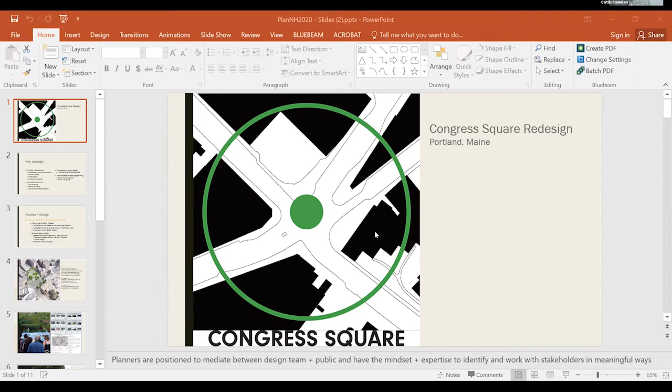And David, Friends of Congress Square Park, they've really fostered a sense of belonging and inclusivity with their efforts so far, between the new furniture, the events, the volunteers, the maintenance.

So you might be asking why redesign if you've created this environment that is sort of the epitome of an urban public space. But as David hinted at, Congress Square is a highly visible and trafficked intersection. And it's in the center of our arts district and on the main street of Portland's Peninsula. But the square is very busy. There are fast moving cars, and cars have really dominated the intersection since the urban renewal effort to create that particular traffic flow and pattern and the park spaces.

And there are also physical barriers there that limit access to certain groups of people. There are uneven surfaces, there's the 4-foot grade change, and there's the intersection itself, which is very wide and difficult to navigate.

And there are elements that make the space less hospitable, such as the lack of seating options, although now that's improved somewhat with the movable chairs and tables, but also barriers to visibility into the space. There are the many steps that provide seating during events, but also can create physical barriers for some to enter the park. And there's a lack of elements sometimes, although again improved with the plantings and the movable tables and chairs, but until those went in, there wasn't much in the space to make it inviting or feel lively unless an event was going on.

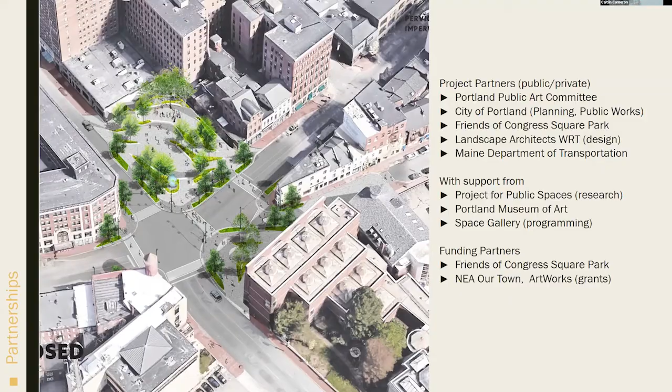So just a couple of things about the vision and design process. We had a lot of different ways that we went about gathering information and having a visioning. People who spend a lot of time in this space are the ones who should be telling you what they want and need, and what's not working now.

So the project partners used a combination of techniques to determine the vision, goals, and programmatic needs for the redesigned Congress Square. Friends of Congress Square were instrumental in collecting data—you can see some examples here. The programming that has happened already is key data, and there were also studies done around circulation and how people are using the space.

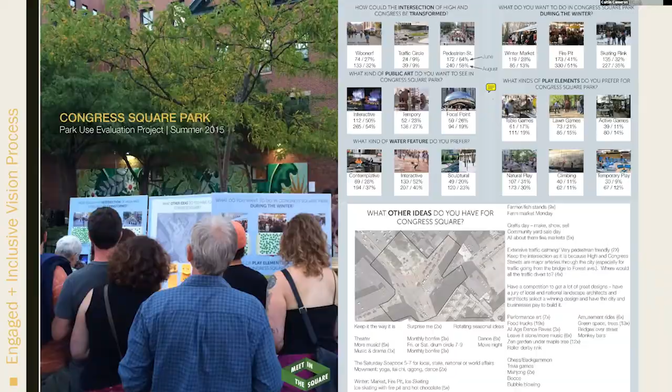The planning office really thought about different ways to be inclusive in this data gathering and visioning process. For example, posters and meeting announcements included translations into 4 other languages.

We used Neighborland to brand the vision process and collect ideas through social media such as Twitter, online surveys, and traditional in-person facilitated meetings. But we also thought about how to be inclusive for people without internet or smartphones, or who otherwise might want to be anonymous in their feedback.

So we had these billboards in the space itself and at City Hall with Sharpies where people could tell us what they wanted in Congress Square.

The resulting vision statement and program for the project came from all of this visioning input, but the crafting of the vision statement and program were also opened up to stakeholders to provide edits, suggestions, and comments to fine-tune those documents, which were then used to go out and select our consultants.

So we did go through an RFQ process. The project also includes a public art commission as well as the landscape and urban design.

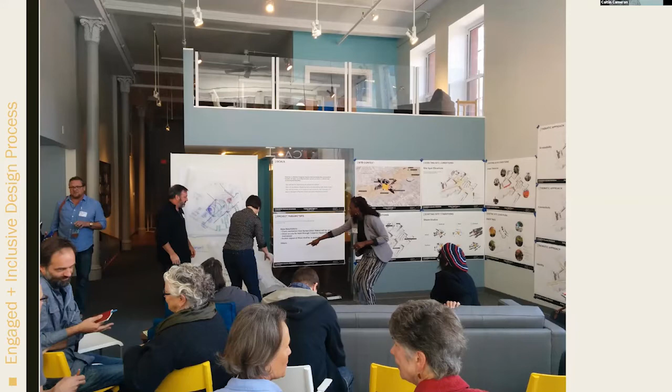The initial design phase included a 3-day workshop and open houses in a co-working space on the main street of Portland, very visible, where the public and stakeholders could walk by that storefront and observe or participate and provide critique, see the design work in action, come and go. The hope is for broad community buy-in and ownership of the end result due to all of this direct participation and input.

So just a couple more points on the design itself. Having all of this process hopefully is leading us towards an equitable, inclusive, and accessible design and result. Some of the inclusive concepts or programmatic elements part of that design include all season use and visual interest, day and night use with safety and visibility, variety of seating types and different conditions, accessible to all abilities and ages, access to art in public free setting, access to Wi-Fi, which the Friends group has been able to provide for a number of years, and also the opportunity for outdoor dining to continue for the adjacent businesses.

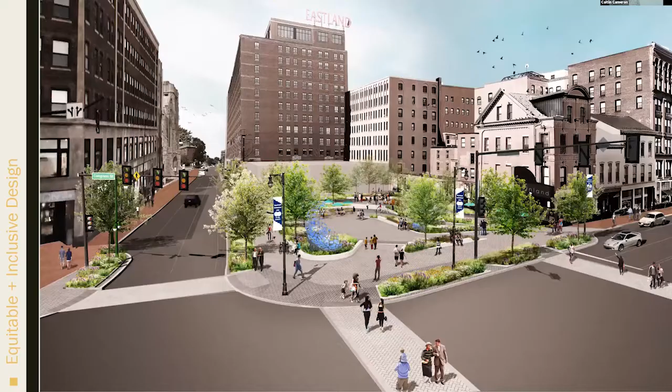So this is a rendering of our design development for the space. This includes the intersection as well as the park spaces. That idea of accessibility is not just the pedestrians in the park, but thinking about right now, the cars and vehicles really dominate the intersection. So there's a major goal here to rebalance the intersection in addition to the park spaces towards complete streets, having them be more multimodal and safe for hearing impaired, visually impaired, and those kinds of considerations as well.

So I'll close with a quick lessons learned. This kind of partnership, having a public-private partnership project team, definitely comes with challenges. It's more cumbersome to coordinate schedules, for example, or it can be difficult to find consensus and keep the conversation on track and provide feedback to the consultants in a cohesive, unified way. But it definitely adds time and effort to do a project in this way.

But there have been so many benefits, including my own personal appreciation and buy-in for the project. It's in my neighborhood, and I live and work here as well. So there's just such a strong connection for this place and the people I am working with and for. So that's sort of my piece on the whole deal, and I'll turn it over to Misa.

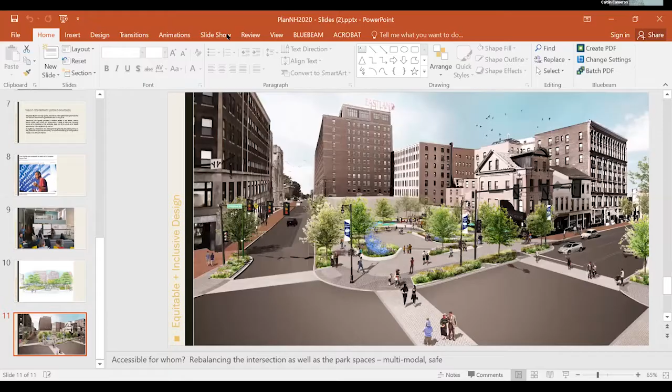Great, thanks so much, Caitlin. That was great. Yeah, this is certainly an exercise in placemaking.

So it's not just creating a park, but it's creating a place. And as the Project for Public Spaces points out, there are 4 key ingredients to think about. You need to think about the sociability, the uses and activities which are going to happen there, access and linkages, not only physical but visual and other ways, and then comfort and image. Do people feel comfortable? Is it sittable? Can they hang out? So that's really great.

And now I'd like to introduce Misa. Misa, you want to unmute yourself? Misa is with WRT Design in Philadelphia. She's a landscape architect, and she has worked on the redesign of this place going forward.

Hi, everyone. This is Misa Chen. I'm a landscape architect, senior associate with WRT. Our main office is in Philadelphia. We also have an office in San Francisco. So today for my part, I'll be focused on the strategy to make a public space for everyone.

Continuing the conversation from David with Congress Square Park, that has been activating the space over the years with project partners from the cities and other stakeholders. Really for our task, it's more of how can we as a design team continue that momentum to reimagine the public space that's already well beloved, activated. People know where to go if they need a tiny getaway space in the downtown art district here in Portland, Maine.

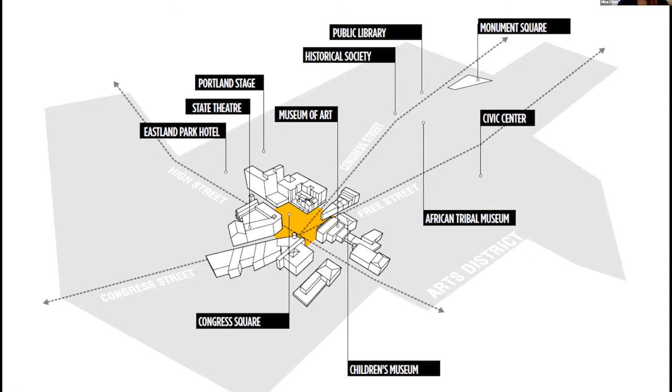So just to orient you, you guys are probably more familiar than myself from Philadelphia in terms of geographic distance and all that, but just pulling out from where we are here, looking into the intersection. When we joined the project, we were tasked to really re-envision the overall intersection as a whole, and we call it Congress Square. Congress Square Park is part of the corner there, surrounded by the State Theatre. We have this historic H.H. Hay building at the little triangle wedge shape there, and we have the PMA Museum of Art right here. So we looked into how to transform the overall intersection with a cohesive design.

Really briefly, just picking up from part of the process that David and Caitlin already mentioned, and really from the design team's point of view, what is our design process here as part of that inclusive process?

So backtracking there, back in 2016, May 4th, we had an interview with the city in the morning. The same day, in the evening, we also had a public presentation to share our thoughts. It certainly was a very unique situation where we got to have more focused conversation with the client group. At the same time, we got to share our thoughts, our team strategies, and some of our ideas with the larger community folks at that location.

Here you can see we actually had the public presentation at the PMA that evening.

So when the project started, kickoff later that October, we started off with a workshop, one of three workshops we envisioned to have. Despite that, there's been a lot of conversation and discussion throughout the visioning process that Friends of Congress Square Park and the city have done, also with PPS. From our design team's point, we've settled on a larger vision statement, and we wanted to refine it into a goal, coming up with design strategies, and start working toward an implementation plan.

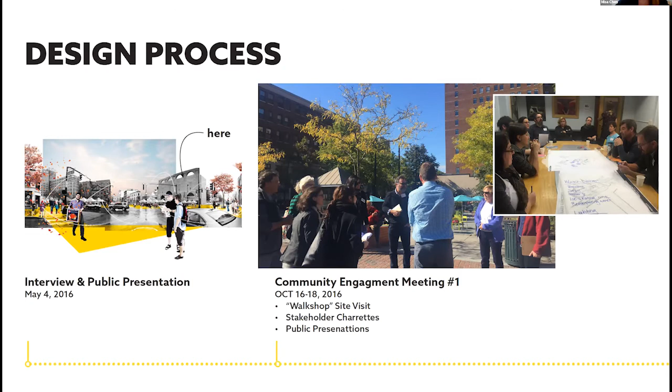Continuing, we had another two community engagement meetings, every other two months, checking in with the community to share our progress and what we're up to, continuing to refine our design by incorporating comments, feedback, and anything else we overlooked.

As you can see, it's a very well-beloved space, and everybody knows the place more than probably we do. They know the daily basis needs, the seasonal needs, and what's working and what's not working.

So with all that anticipation and engagement, we kind of arrived at the schematic design wrapping up in 2017, and continued moving on in terms of design refinement, the design development as we call it. It was completed two years ago, in 2018.

So currently we're working with Maine DOT and other agencies just to continue pushing through the project, waiting for the next stage in terms of wrapping up the construction documentation.

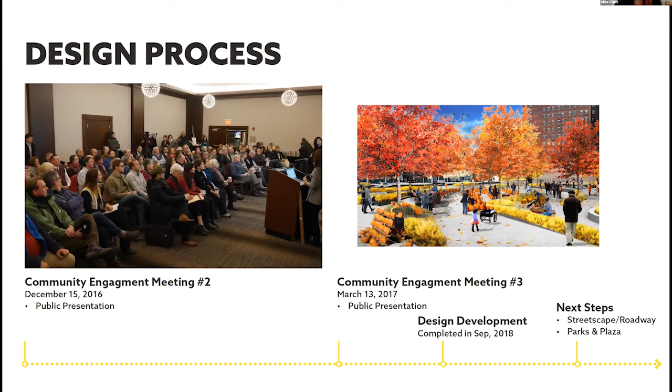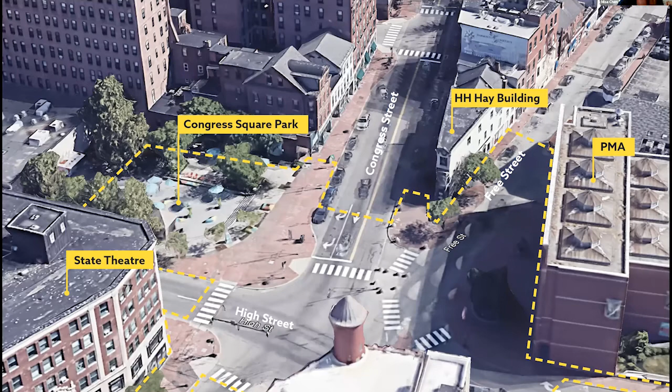So a very quick one, how do we get from here—as you can see, the current day it's well used, with seasonal interest out there—how do we get from here to an overall transformation here. So in the next couple of slides, probably 8 to 9 minutes, whatever time I have, you'll get to learn and hear a little bit about the design strategies and tools that we use to transform the space.

Just to distill from the visioning statement, understanding the project goal: to create a welcoming, inclusive Congress Square Park, celebrate local arts and culture, foster spontaneity while remaining accessible and inviting to all. So we refined this into three perspectives that could bring positive social wellness, accessibility, and identity impact.

How can we continue to reinforce some of these strategies in terms of social and wellness? We aim to create a space that can support year-round, day-to-night, active versus passive or contemplative activities. Some kind of experience where you don't just walk in and learn it all at once—you have elements of discovering, creating curiosity and interest from time to time when you visit the space.

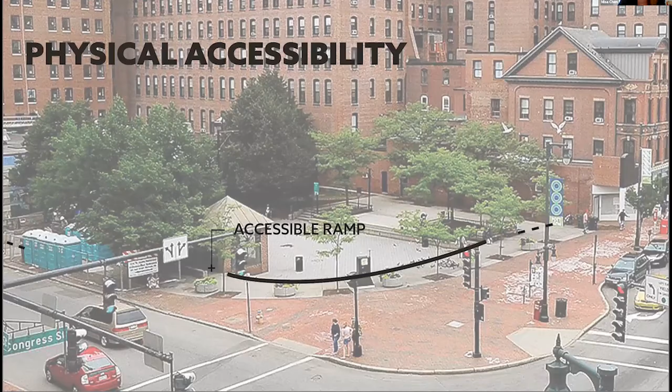So here's an outline of the permeability—how people can really enter this sunken space while still providing a comparable entry experience. How can we all go visit the park together?

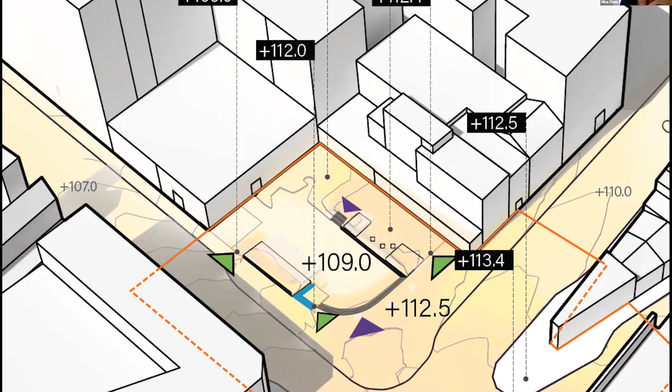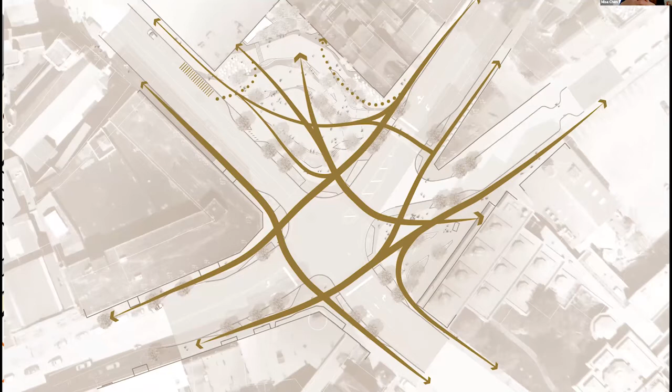This is some of the technical study we went through to understand the current characteristics. The green arrow shows the flush condition where people can come in, and the blue outline is the little ramp behind the clock tower. Can we take this character and transform it into something more fluid, where people understand the hierarchy of where the main entrance is and where the accessible route is, without feeling like they have to take an alternative route to get in there?

So we did numerous studies to reimagine this space as a continuous surface, understanding that the sunken character is still very much what people feel is unique about Congress Square Park. We wanted to maintain that somewhat sunken character, so we make it a continuous space, gently pressed down, cut through with stairs at the intersection to acknowledge the main entrance, while allowing the rest of the boundary to be as accessible as possible.

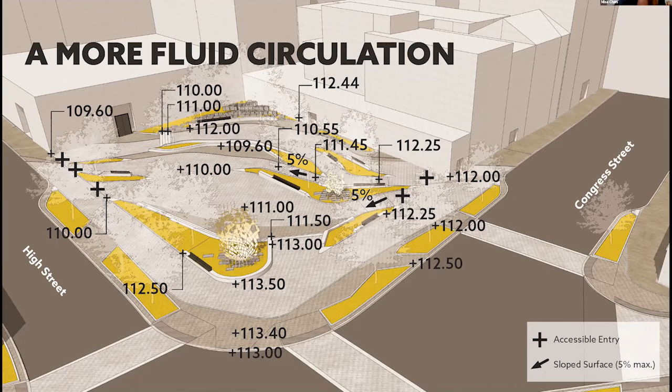So then people can take different routes, whether they're going to the stage, entering the main park area, or going through the planting area to your right-hand side. This close-up demonstrates a more fluid arrival experience, where people can enjoy getting to the center of the park without feeling that the stair character is hindering how they arrive there.

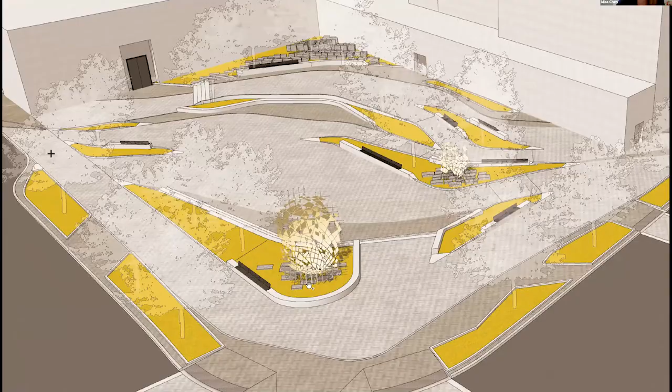Once we understood more of the circulation and arrival experience, the next thing—quite core to Congress Square Park—is the programs and activations. There are programs for everyone currently, and we wanted to make sure the redesigned park continues to accommodate that, programs for everyone. We can see some examples out of the 200 programs David mentioned, from small, medium, large to extra large, including civil and social movements that extend beyond just Congress Square Park to all intersections. So it's about giving a space intentionality while balancing it with flexibility.

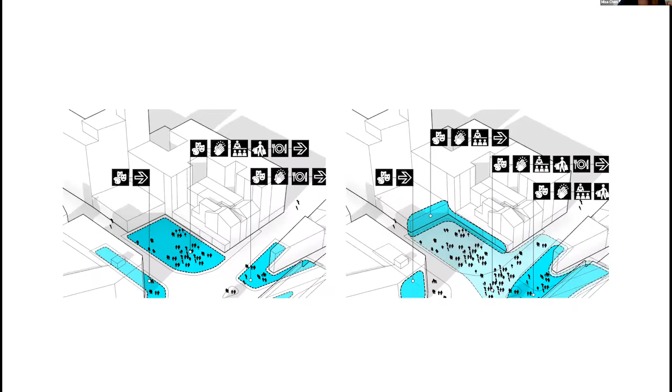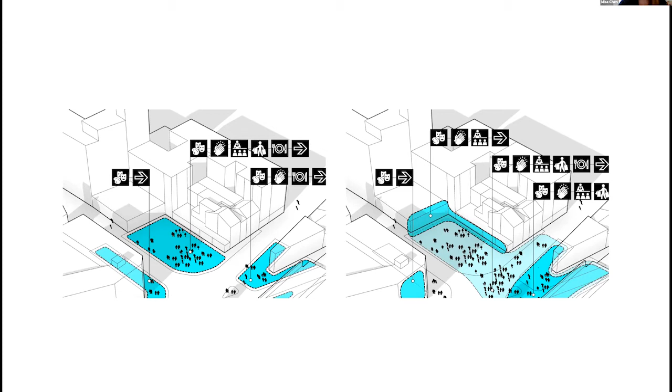These are some of the early on diagrams, super high level, but we wanted to think about it, Congress Square Park, and when there's a special event that will extend through the intersection, and maybe some of the wall space, we can also think about activating them as part of that program activation. So after the bubble diagram fits into the site on top of the layer of circulation, then we start to carve out the space.

This is testing through numerous rounds of back and forth, working with the city and Friends of Congress Square Park to understand the size of the dance mat, how many would they usually use, and the size of typical movie nights. Every pocket is intentionally laid out, but in a way that when there's no event, there's still a certain setup to activate the space.

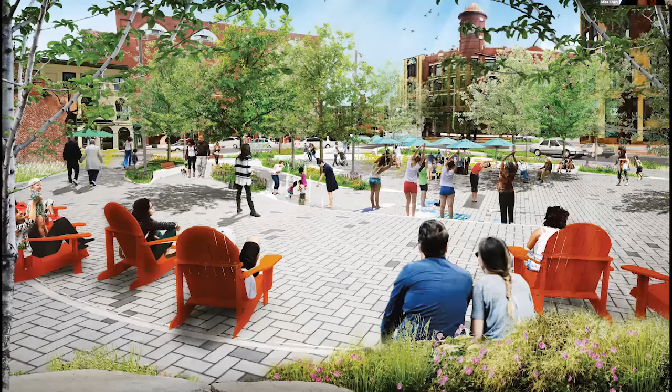At the same time, there might be people who just want to pass by, not super engaged with the whole event. So we want to balance the directly engaged group versus the passively engaged group, and people who don't want to be engaged at all, making sure there's a spatial organization that can accommodate different modes of social interaction here.

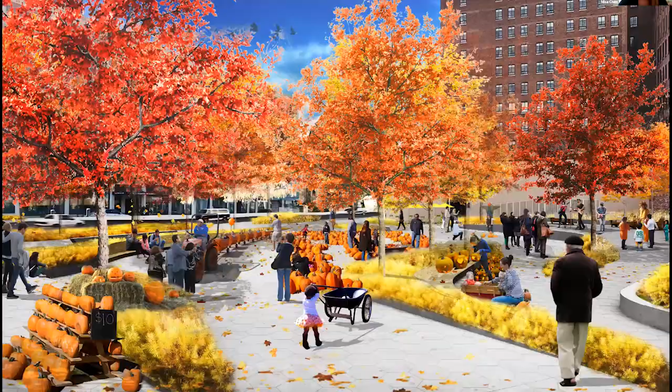Quickly, a couple of views—we wanted to create a vision that's also realistic and achievable. In summertime, the water jets are activated, yoga happening maybe not directly in the wet zone but close by, movable tables and chairs in the background, and the Adirondack chairs that people recognize as Congress Square Park. There's been a sun-facing spot, and we wanted to keep that tradition. Through the fall season, some festivals, an ideal snowing day—the whole park could be somewhat artistic, supporting the holiday tradition with the holiday lights exhibition.

When I touch on social interaction, that's where we start to look into the seating arrangement—where to sit and when. Through winter and summer, some people prefer to be exposed to the sun. In summertime you might need sunshade, but people might also want to sunbathe, so we looked into understanding how the shadow casts through this open space.

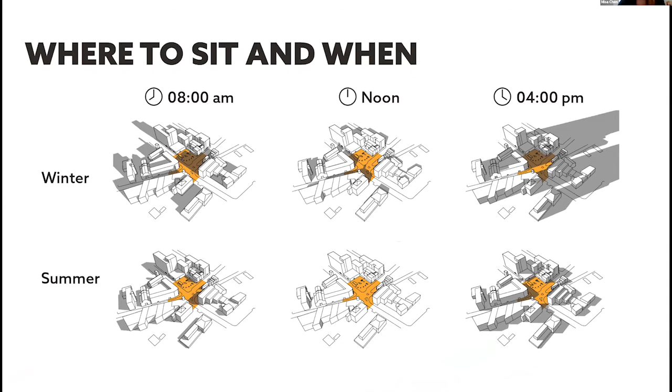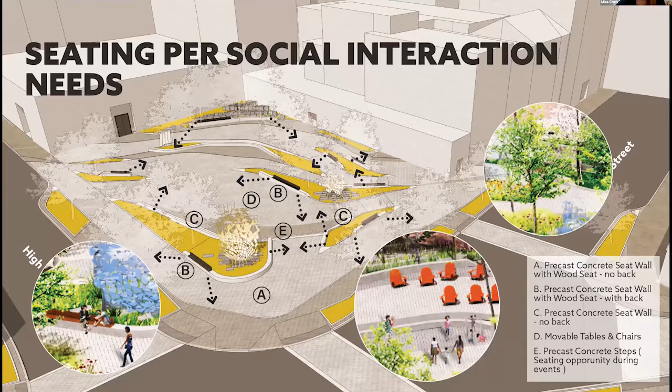We also looked into the programs—some of the larger seating arrangements need flexibility for larger events. Movie nights or quiet personal time involve smaller groups needing more focus and quiet. For people watching, they want to sit and see what's going on without necessarily being directly in the event space. So here's a diagram showing the seating per the social interaction needs.

We can have more of a street front feel. It was also interesting discussing with the city and Friends of Congress Square where you want to invite people to sit longer. We intentionally placed this wood insert so it feels more comfortable, or in some areas more transitional.

People sit, wait for a friend, catch up, or have a laptop there for a short while. There will be more of just the concrete seat wall without the wood insert. Even with the wood insert, we talk about with the back or without the back, because if you want people staying longer, with the back it's certainly more comfortable. There's a certain level of this design detail trying to send the message that you're welcome to sit any way, in any direction.

In addition, what we're not showing in this drawing are movable tables and chairs, which will be added depending on the season and programs in that D circle area.

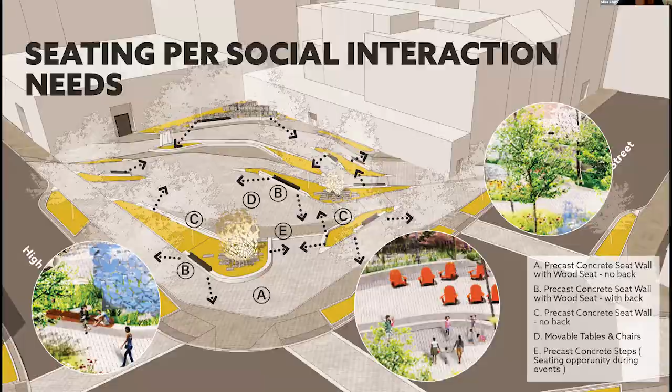One more layer to summarize our design exercise is utilizing planting as part of seasonal interest and a dynamic landscape for the park. We're working closely with the horticulturist, Patrick Cullina, to come up with the planting palette that will work from the streetscape threshold into the surrounding park area.

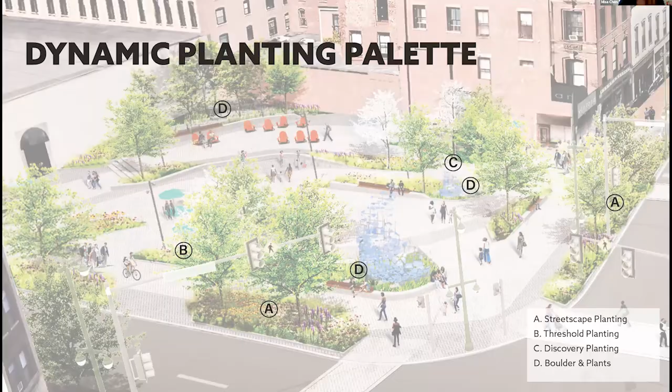So we're thinking to incorporate boulders and plants poking out between the scene as a highlight area. On this side you see some of the notes around the art pieces and the back of the natural play area. Generally the planting scheme will be locally adaptive and reasonable.

We understand there's a lot of snow during the winter, so whatever is planted has to be reasonable for harsh weather, and also account for plowing snow and dumping it into the planter areas. Taking that into consideration, we're still refining, but happy with a palette that can support that dynamic landscape purpose over the seasons, while still being reasonable to maintain over time.

So this is the Congress Square Park reimagined. We've been talking about a more accessible spatial organization, with intentionality to carve out pocket spots to support all kinds of programs, day to night, weekdays and weekends, as well as layers of planting to make people feel a seasonal change and a getaway moment. We're looking forward to continuing work with the city and all stakeholders to implement this Congress Square, with the Congress Square Park as the heart of this project.

Thank you. That's my presentation today.